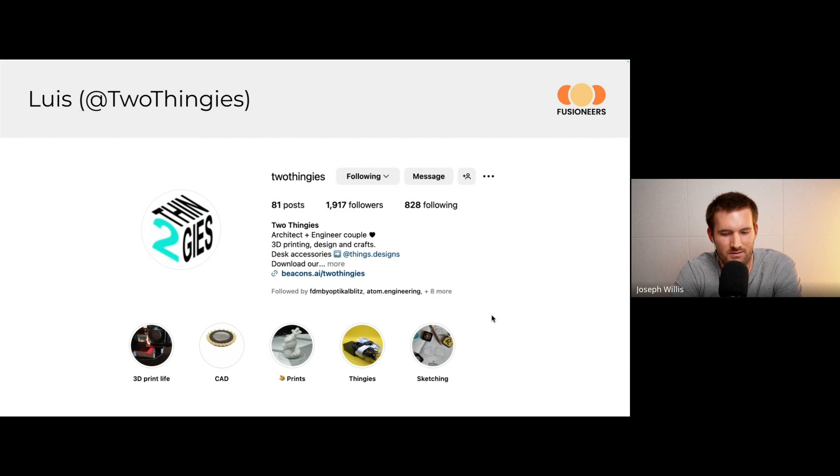I'm Joseph, and today we're going to do another expert design walkthrough. Today we have Luis with TwoThingies. He also has some other Instagram pages where he shares different content. I'm pretty excited about what we'll be going through today.

So Luis, you were telling me a little bit before we started recording how you and your fiance manage this account. Can you tell the audience a little bit about how y'all do that? I think it's pretty interesting that y'all can do a two person Instagram account, and it works out pretty well for you. Yeah, thank you.

My fiance Uri, she's an architect. She has a good eye for aesthetics, and she's really good with photography. And I'm more, let's say, on the modeling side. I like designing functional things, using 3D printing to make functional designs. So we decided to combine those two sides to share useful designs for 3D printing.

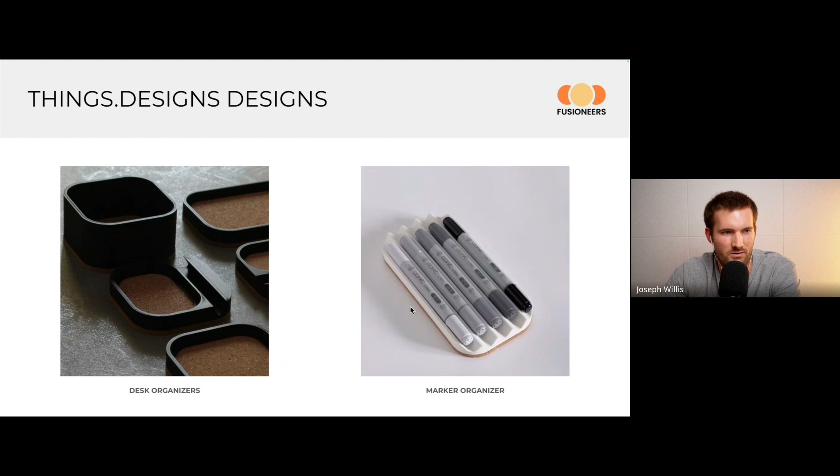And then here's some more from his Things.designs account, where I think it's more focused on desktop accessories. And here you see the corkboard again, and this looks like a marker organizer. So I just really like that aesthetic. I think that's a really clean design language that you have there.

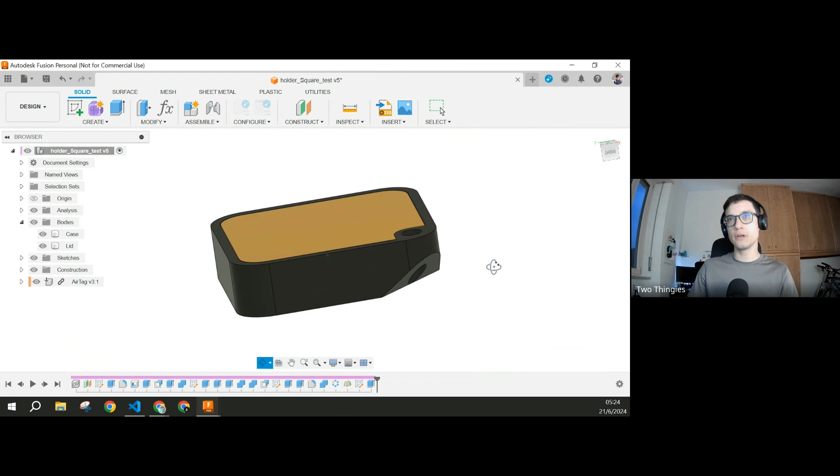So I'm going to be showing you how I modeled this. It's a pretty easy design, so I think it's great for when you're learning Fusion, or when you try to design something simple to 3D print. This could be a great example. Yeah, to sort of interrupt you there, but I like how you have the AirTag as a linked component. That's for people that aren't aware.

You can basically insert other components into your design; it references another design in a way, so you can have the linked component outside of your file and then insert it and design around that. So if you're designing multiple AirTag holders, it makes sense to make the AirTag once, and then you can pull that in and model your different designs around it. So I think that's a really good use of that feature within Fusion.

So yeah, sorry to butt in, but I just like to make a comment where I think that you did a great job using Fusion there. So go ahead. Thank you. Yeah, thank you.

Well, the first step is always save your work before anything goes wrong. You can always come back to it. So yeah, let's get started. So the first step, of course, is to insert a new component. In this case, I have already saved here a folder with 8 different AirTag designs. Some of them are already online.

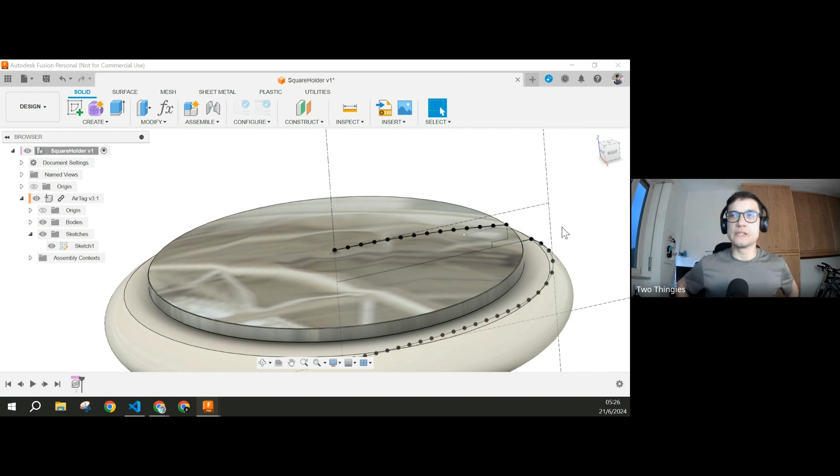So, for example, this is an AirTag. I just downloaded the Apple design guidelines, and they have the profile of the AirTag. You see, they have also all the contour points. So I just copied that to Fusion, and this is a revolve body. I cannot edit in place with the free version, but when I come here, you see it's just a revolve operation. I separated the cap and the body, but it's not necessary if you just need the contour.

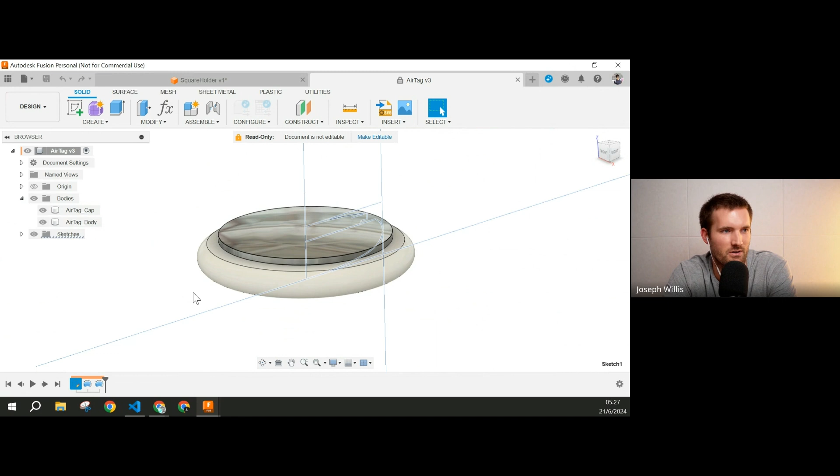So for people that are wondering, the reason he separated it, most likely, I'm just assuming this, is that way you can assign different materials or appearances to both of the bodies. So it makes it easier to make it look more representative of the actual product. As you can see, it has a mirror finish on the bottom, and then the more white plastic, which is characteristic of a real AirTag. So is that what you were thinking when you did the two bodies?

Yeah, on one hand, yes. On the other side, I wanted to see if it was possible to separate the two of them for some designs. Not in this one we are going to do now. But there are some designs in which I wanted to be able to split this and pull it out. So having separate bodies is good for that. It's easier for doing that.

Makes sense. And then just real quickly, I didn't know that Apple released those. I've always just tried to reverse engineer it by hand. Where do you go to find those? Do you search something, or what's the best way that you know of?

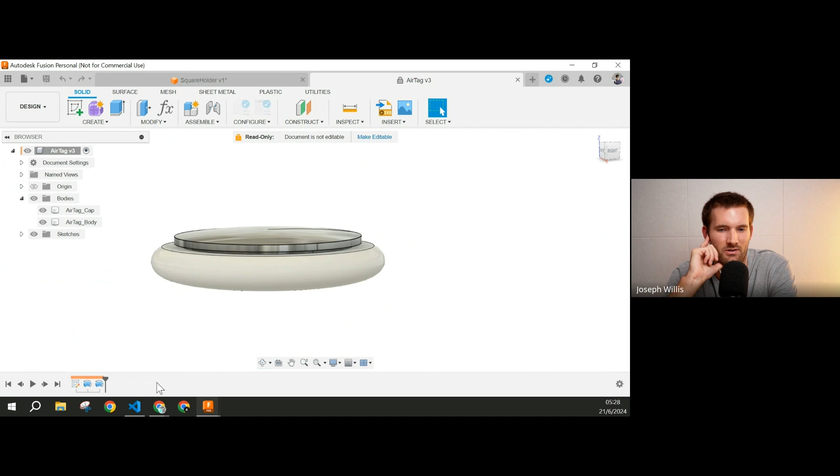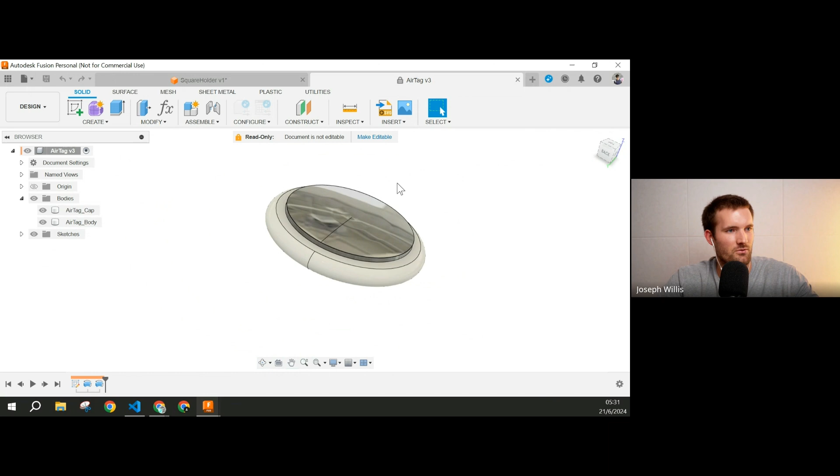Okay. All right. So coming back here, the first thing I did was insert this directly into the design so I can reference it while designing. So next, let me show you how it works physically. So the idea of this design is to, I don't know if it's something we can see.

So the idea of this AirTag holder is to have the logo visible here, and then the rest of the AirTag is covered. So I'm going to create an offset plane and start drawing at this level, before the cap meets the rest of the body.

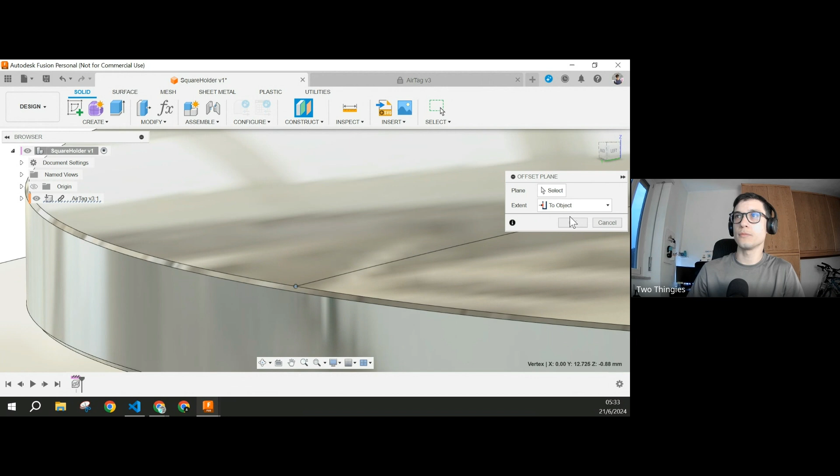Okay, so first thing here, I'm going to create an offset. Instead of distance, I will select to object. And then I will select here this edge, the bottom edge of the chamfer, or a point on that edge. For example, here. And make it parallel to this plane here. And then selecting this point, it becomes coincident with that.

That way I avoid taking odd measurements, like this is 0.88 millimeters or something like that. I avoid taking this measurement by hand. I just reference some geometry to do that. I will create a sketch here. I will call this one top plane. I like to give names to the planes, so it makes it easier for me to reference it back.

So basically, you made a new plane that's going to be the base, or the part that you extrude from, because the AirTag is a little curved on that surface there. So you essentially offset the plane to where it's at the level that he wants it to be, flush with the edge there. Just for everyone that's listening.

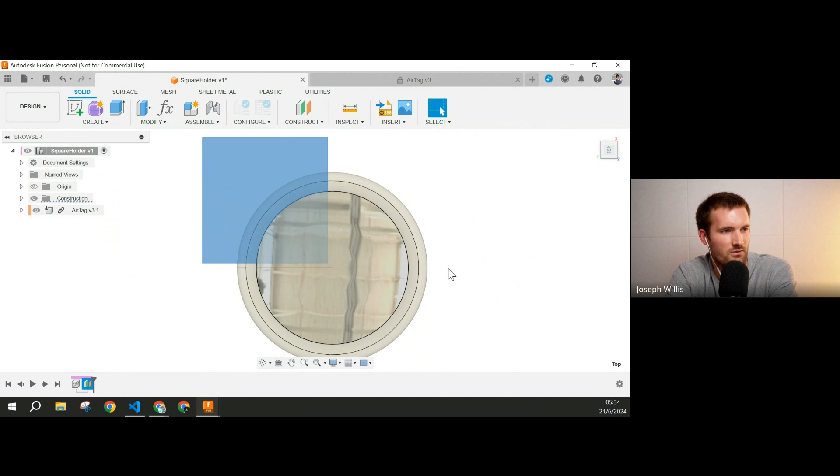Yeah, exactly. For example, there is a planar face here. You could sketch here, but I prefer to avoid taking this odd measurement. For example, here is 1.41 millimeters. Then you have to remember that, make an offset of that distance. Then everything you extrude has to consider the offset from this face. So I just prefer to place the sketch plane on a reference geometry in this case. Making it easy for yourself. Yeah, exactly. So the next thing, I create a sketch here.

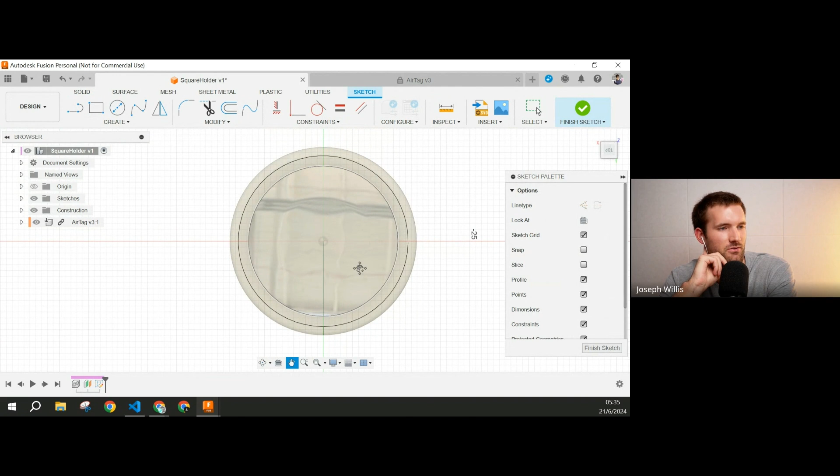And for that window, did you use the S shortcut? Yes, I pressed S on the keyboard. When you press S on the keyboard, you get some options, right? I think the create sketch option wasn't here by default. I added it. When you search for any command, for example, if I look for a shell command, it gives you the option here to add it. Like pinning it, sort of. Yeah. So it becomes available next time.

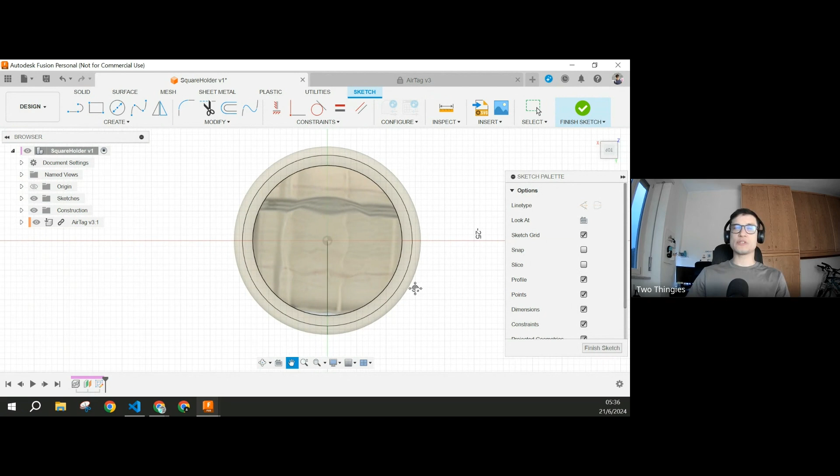For some reason, I've never gotten a good habit of using that. It's a very useful thing to use. So the S key will let you search for different commands, to make you more efficient. Yeah, it helps you save some time. Also, sometimes you don't remember exactly where some command was, so it's easier to just have it there, especially things you use all the time.

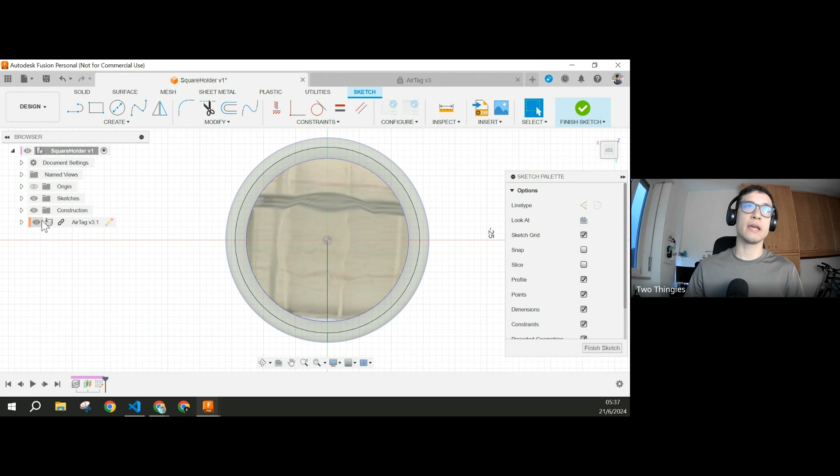So here what I do is a projection of the AirTag to model from it. So I do project on sketch. I press P on the keyboard, and that brings the window for the project command. I will project some specified entities in this case. So I select here the outer edge of the AirTag and project that one. And I also want to project the outer contour of the AirTag. Okay, so now I have those two features. I can hide the AirTag, and I can work on this.

I also like to create some parameters to adjust later on the design, especially with 3D printing, things that I know I will probably need to come back and change after maybe a first prototype. So I come here on the solid tab, select change parameters, and create a new one. First one is definitely a clearance parameter. In this case, I already did the design, so I know the actual value. I'm not going to change it, but it's useful to have it.

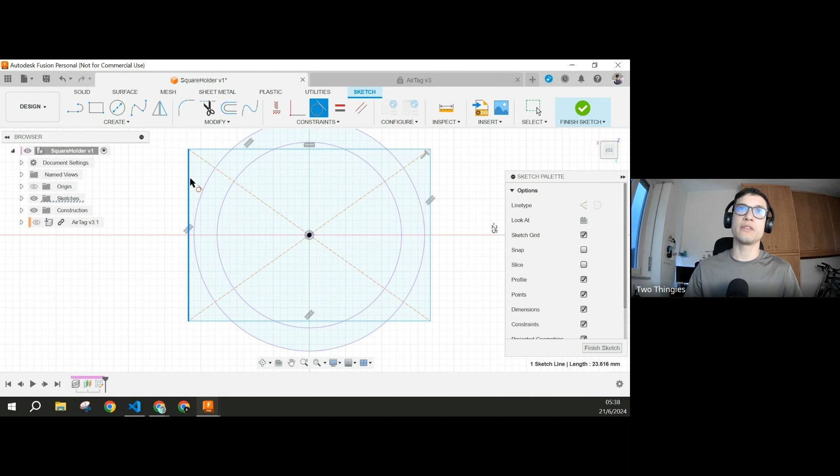And I define some other things, for example, a wall thickness that I can use while I'm designing. I think that's it for now. Maybe I can add some others downstream as we go. So coming back to the sketch, I press R for the rectangle, select the center rectangle and create a new one, just like that. And I add some tangent constraints to make it tangent to this one. Oh no, sorry, I messed up.

Okay, that's all right. So first thing I want to do now is to create some offset lines from these two, so we don't have any matching faces to the AirTag, just a small clearance, the parameter that we created. So I create here an offset, select this one, and give it the value of the clearance parameter that I just created. I make sure that it's on the outer side. If I wanted to change that, I could just click here. So here's OK.

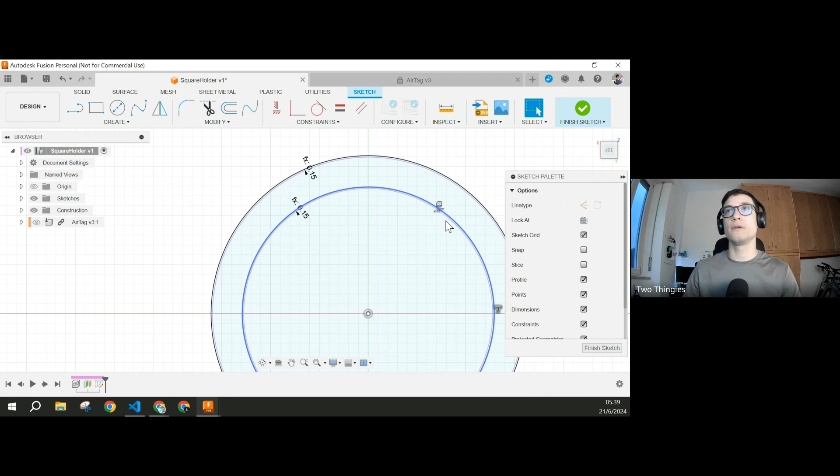And I will do that also for this one, also referencing the clearance parameter. What makes that so nice is that if you have a printer that's slightly different tolerance, it's easy to change your clearances there just by changing the parameter, and then everything updates, and you can easily print again, or even if you have a small part, you can try a couple of different clearances on one print bed just to be a little more efficient to figure out which one fits best for your printer. So I like that a lot.

Yeah, it's really, really useful. Like the times I didn't create the clearance as a parameter, it takes more time to go back in the design and check where did you use this dimension, where is it propagating, what features are affected by it. So it's just easier to just have a parameter that you can change directly.

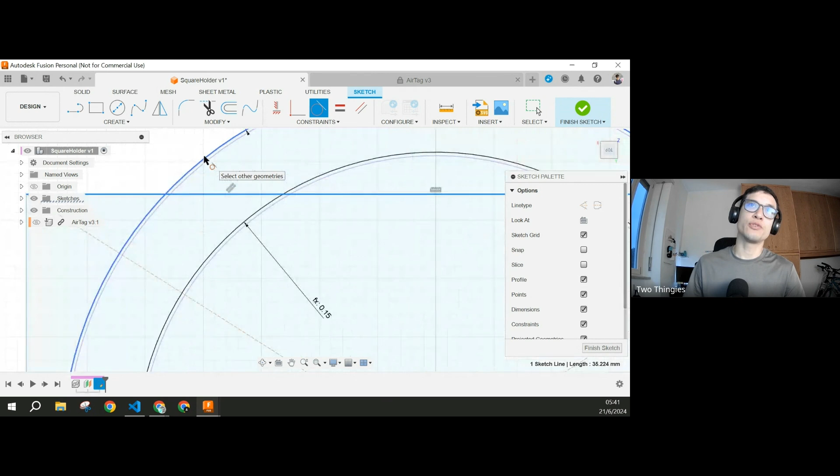Right. So yeah, once we have that, I press R, or I come here. It's the same, and I select a center rectangle. I center it here, and I just throw it in there. I don't care about the dimensions. That's why I have the reference geometry. So I add some tangent constraints to the outer circle. So now it's tangent there, and also here. Fine.

So that defines where the AirTag will be enclosed, the inner side of this enclosure. And I want to create the outer side. So I just add another offset, and I just add the wall thickness. In this case, I just want it on the opposite side. So yeah, now we have this base sketch.

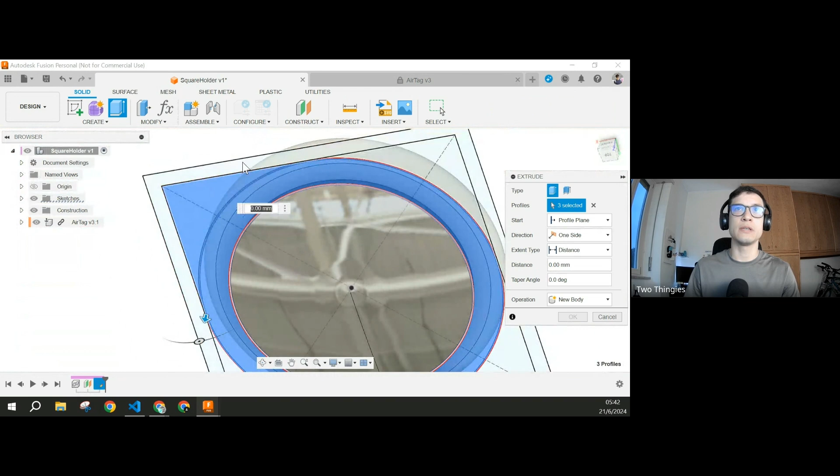I can directly from here hit E for extrusion. Maybe I'll bring back the AirTag just to see what I'm doing. So what I do is select all the profiles, and I'm going to extrude it. Now I know this because I already did it. Distance I want to use is 9 millimeters, minus 9 millimeters, and I'm making sure it's in this direction, of course, to cover the AirTag. That's why it's helpful to have the other body visible.

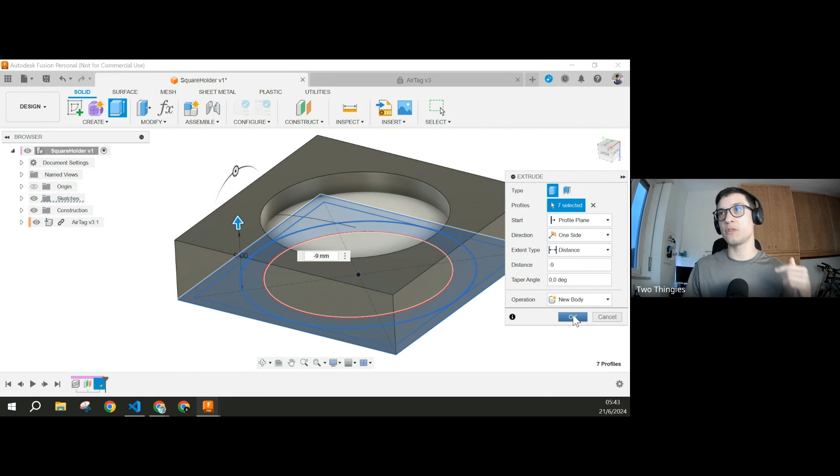Since it is a different component, it won't merge, so by default it creates a new body. If I was using the AirTag as a body within this same component, then I will need to make sure it's a new body, otherwise it will join everything together. So yeah, I just create this one.

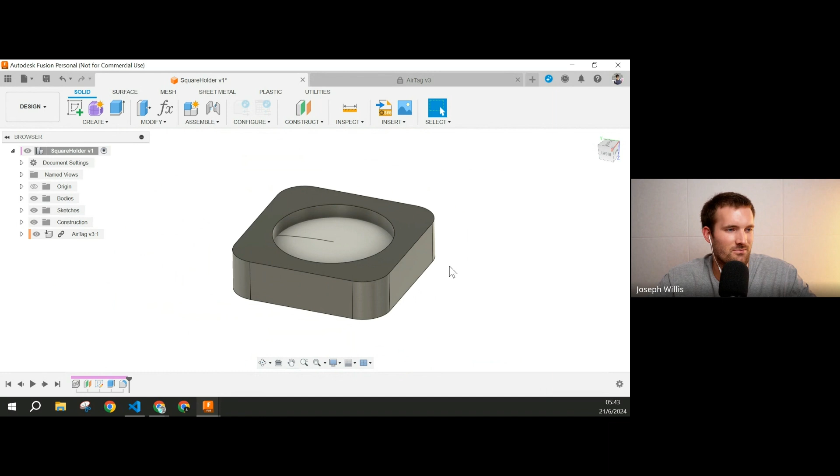Next, I want to add some fillets to this. So I pressed F on the keyboard, and I can select here the edges. Now I'll give it a 6 millimeter radius. And for your fillets, do you have any thought process behind that? I kind of just guess and check honestly, and just see what looks good. Or is it just what's pleasing to the eye? There's probably some design science behind it, but I usually just pick the one that looks best to me.

Yeah, well, really with these kinds of designs, they are functional, but mostly aesthetics. They won't break, they don't have to hold any weight or something like that. So it's just the form factor that you want to get. Right. So what I do is, if I want to make different designs in the same series that look similar together, for example, the desk accessories series that you were showing on the other Instagram account, I try to keep the same ratio of radius versus the side of the component.

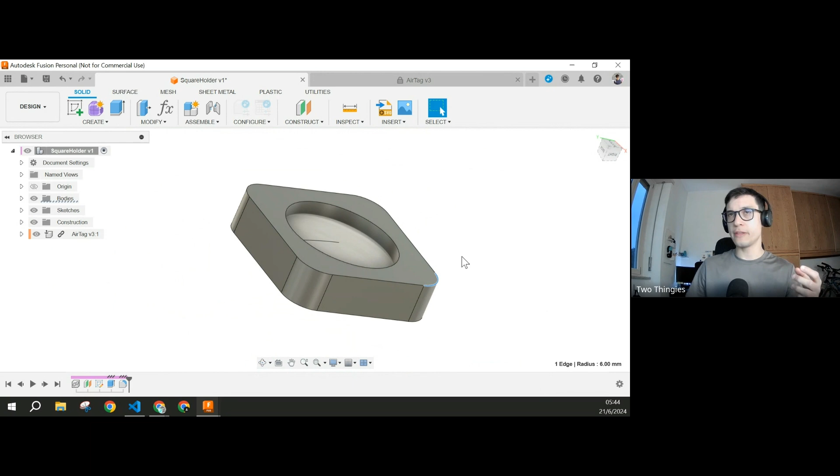For example, this one is 35 millimeters and the radius is 6 millimeters. The ratio between those two numbers, I will try to keep it constant. So if I design another component which is part of this series, let's say a bigger component, maybe a base, a phone holder, or an iPhone charger, I will keep the same ratio of radius versus side to make it look similar. Okay, I see. Yeah, and the other thing is, if it was a component that is more structural, something that needs to bear some loads, then I will check.

For example, if I need to bend some sheet metal component or something around this radius, then I will check the thickness. You know, they always tell you 1.5 or 2 times the thickness should be the radius. That's it. But for more things like that, it's just depending on what shape you want to get. I don't have a rule.

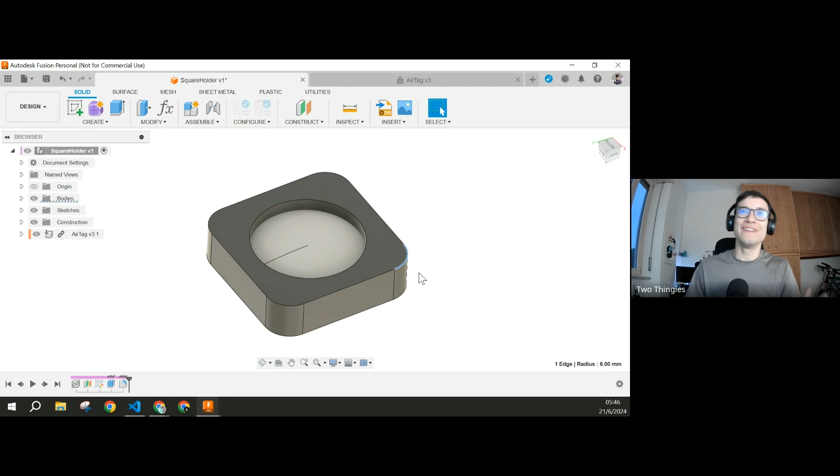Yeah, that makes sense. I like the ratio thing. I never really thought about that, but yeah, that makes a lot of sense. Yeah.

So here the next thing I do is I do a shell. We'll create a shell here on the top face. In here I specify again the wall thickness, making sure it's an inner shell. Okay. So I hit OK. So what I also like to do is to create a cross section. I'll make a section analysis here so we can see what's going on.

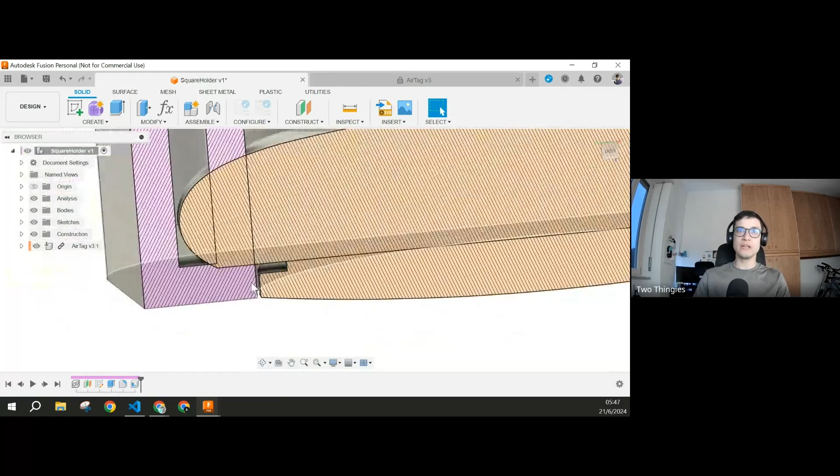So we have a weird shape with this opening here, and then it intersects the AirTag. So I'll just delete it. I can just press delete here. Oh, it didn't work in this case. If I just press these two, I can delete this face. Okay, so it disappeared. So if I hide the AirTag, we have this empty space here, this cavity here, but there's an intersection here. There are intersecting bodies here.

So what I will do is I will pull up this face even more, 2 millimeters. So that made the intersection even worse. But now what I do is I create a cavity where the AirTag can sit in this print. So I will just do a combine operation. I look for the combine operation here.

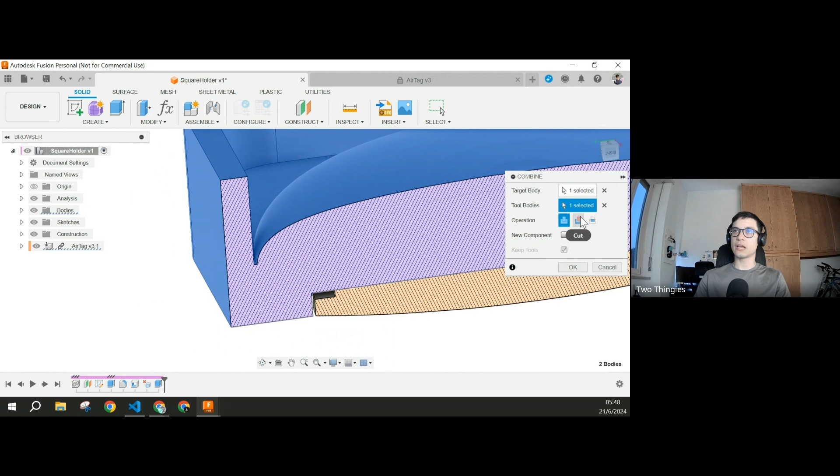And I use this cavity as a target body and the AirTag as a tool. And I make sure I'm selecting the cut operation. That way I remove the intersection. And when I remove the AirTag, if I hide it, you have this nice space where the AirTag can sit when you insert it. So we can move on with the upper part. Now, if I look at it from the sides, yeah, it covers the AirTag, so it's fine.

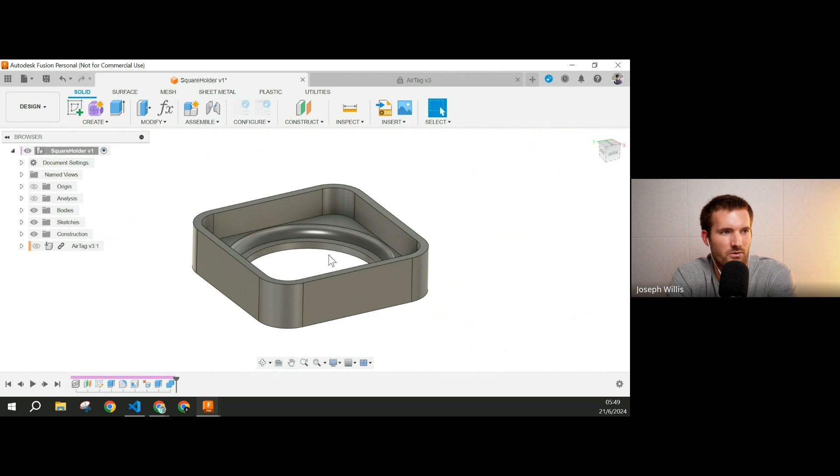Yeah, I like how, when you subtract out the body there, it helps to make sure that the body you're subtracting out is right, and make sure it fits good. It really does make a pretty tight fit there, and that's an easy way to make things. As long as you reverse engineer the original body, it'll fit pretty well, as long as the printer also holds pretty good tolerances. So yeah, I like that technique. Yeah, thanks. It's really useful, and it's one of the main reasons why I wanted to design this following the exact dimensions.

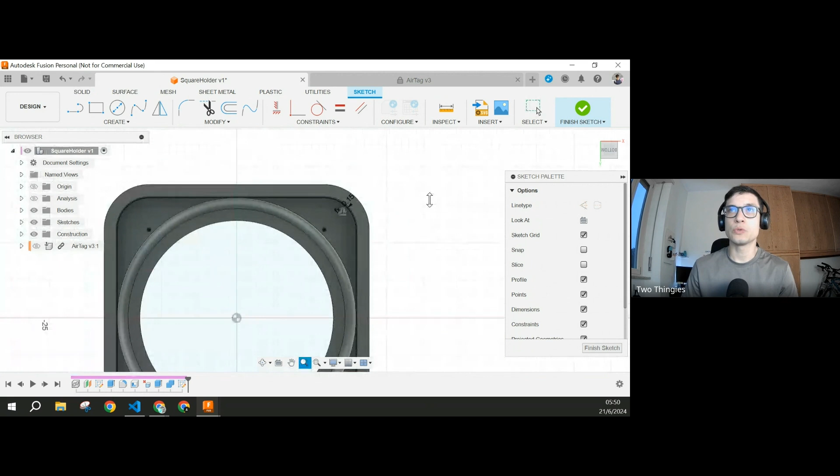So yeah, now we will make a new sketch on the top face here. This time I went to the menu to select the sketch option. I'll do some other offset lines here. Again, using the clearance. That's why it comes in very useful, because you can use it several times. In this case, I want this to be on the opposite side. And I will also make some line.

I pressed L on the keyboard, and I place it here on the center and come all the way up here. Just to do it again, so you can see I place it here, and then when it comes here, it's just at the center. It gives you this midpoint symbol, this little blue triangle there. I like to make this one a construction line. And then I will make a hole here for this keychain, and I will give it a diameter. But I also like to create a parameter for the hole diameter, because it's something you could need to change.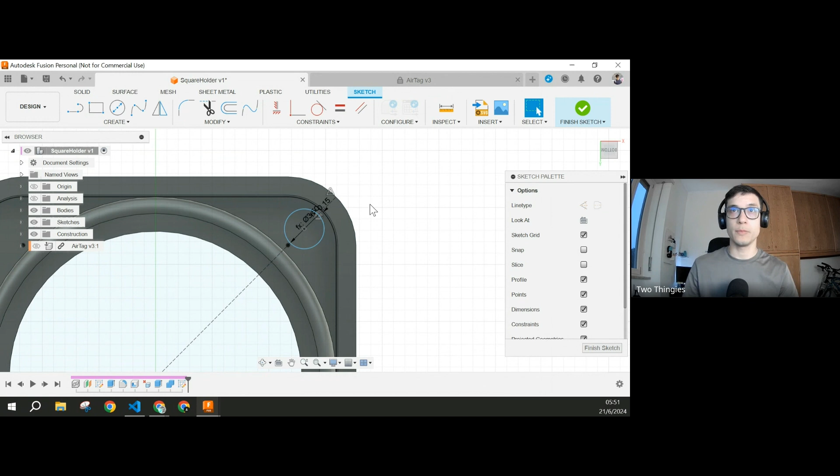Hole diameter. I'll give it 3.5 millimeters. So when I come back here, it's the hole diameter, and then I'll add some distance here across this line to constrain it. So I press D for dimension. I select this point, click on the circle. I right click on it, and I select the pick circle or arc tangent. So that way, now it doesn't do it. Press D again, escape, escape, and D.

Okay, so there you add the dimension, instead of using the center of the circle. Yeah, I just learned that. I think Autodesk or one of the Instagram accounts did a short about that, and I learned that little trick recently. It's pretty useful in a lot of different situations.

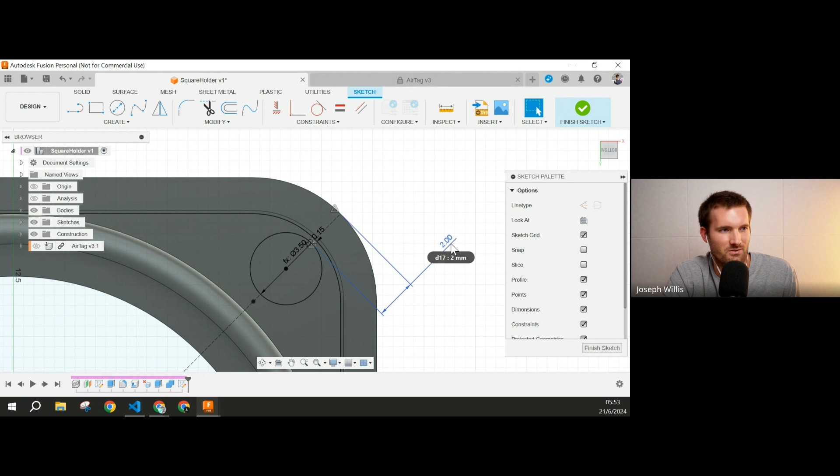So yeah, glad that you showed that, because if you don't know it's there, you have to do some kind of mental math and tricks in your head to get it in the position you want, especially circles or slots. So yeah, I like that little tip. Yeah, it's really useful. If you don't know it exists, then you start doing math like, okay, this is the diameter, this is the distance I want, I want to subtract half the diameter. So yeah, it's just much easier, very convenient.

Yeah, so the next step is I'll just create another circle. I want to make it coincident with this one, and I'll make it 6 millimeters. Actually, let me show you why I do 6 millimeters. Maybe I can do it a different way. Instead of the circle, I would just use another offset. I want the offset to be slightly less than my wall thickness.

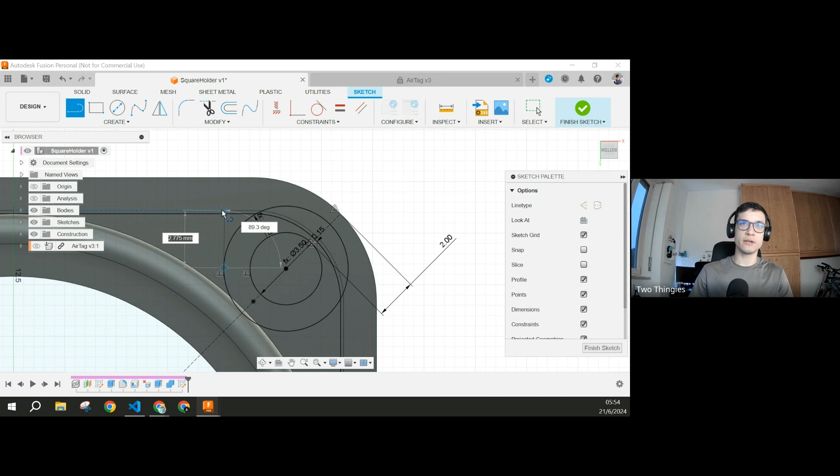I just want to make this corner where the keychain is going to be attached. So it will be part of the frame, and then the lid will have this cutout here. So you will have this lid and the frame with this corner here. I think it looks pretty good. I mean, I like the way it looks.

So what was the reasoning behind making that wall thinner? Was it just a design preference, or was it an interference thing, or what was your thought process behind that? Well, it's just because I don't want to. If it was thicker, for example, if we added this, well, we could just leave it as 1, for example. But it just takes up a little bit more space here. I see. Yeah. It's a slight undercut.

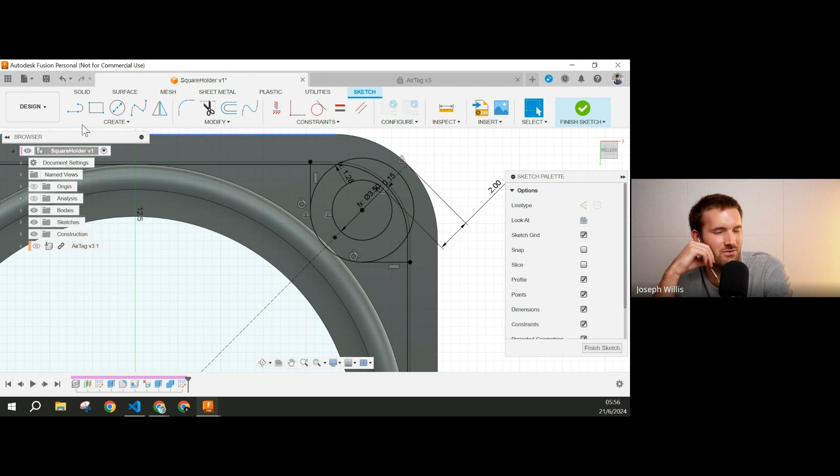It's, let's say, what do you call it? TOC? Obsessive. Oh yeah, no, OCD. OCD. Yeah, sorry, that's my description. So yeah, really, it's not that important actually. I see. Yeah, I was just curious. Cool. It's just personal preference.

So now I'll just extrude the lid. So it's just this area here. I will make it 2 millimeters, this opposite direction. Since it's not touching anything, it's just a new body. Otherwise, I will again need to make sure it's not joining. Yeah, that's important for people that are just getting started. It's really easy to not notice that and then have parts get joined together, and then you kind of get lost in where that happens. So yeah, I'm glad you're pointing that out.

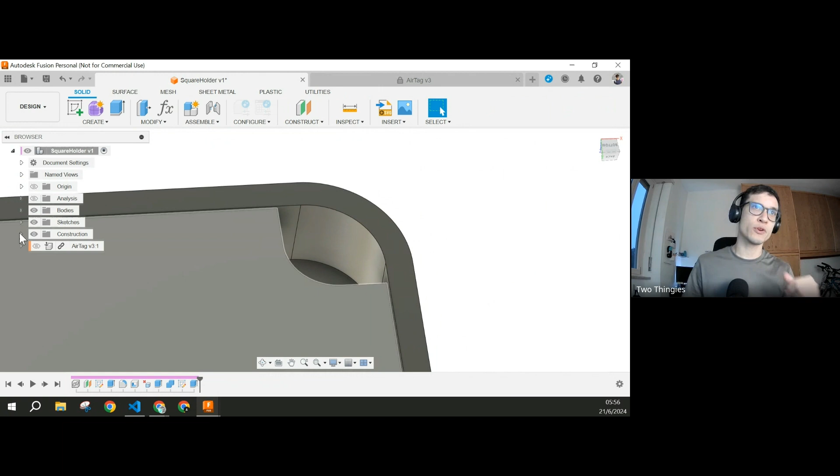Yeah. When I started with Fusion, I come from a SolidWorks background. I used a lot of SolidWorks in college and university, and I also worked a little bit with it in my early days when I just graduated. When I started using Fusion, I found that it defaults to join all the time when you have separate bodies. So it's good to keep an eye on that. Right. You get used to it after some time. Definitely.

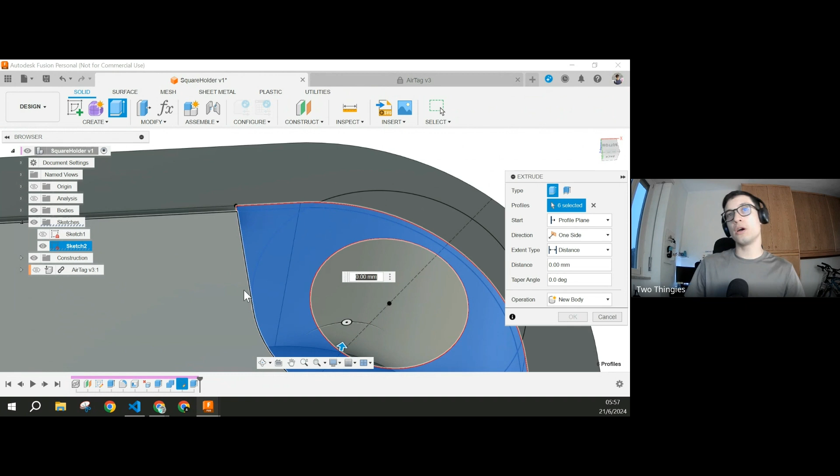So this sketch here, I will use it now again to extrude the other part of the frame, the missing part here. So I'll just select the missing profiles. One important thing, let me go back there so it's easier to see. When I created this line here, I made sure it went all the way through the outer line. So I get this small section here. Because then when I extrude the frame, this would be part of the frame. If I didn't have this small line here, I would just be able to select this one and this would be open. So I just wanted to make sure it connects to the rest of the frame.

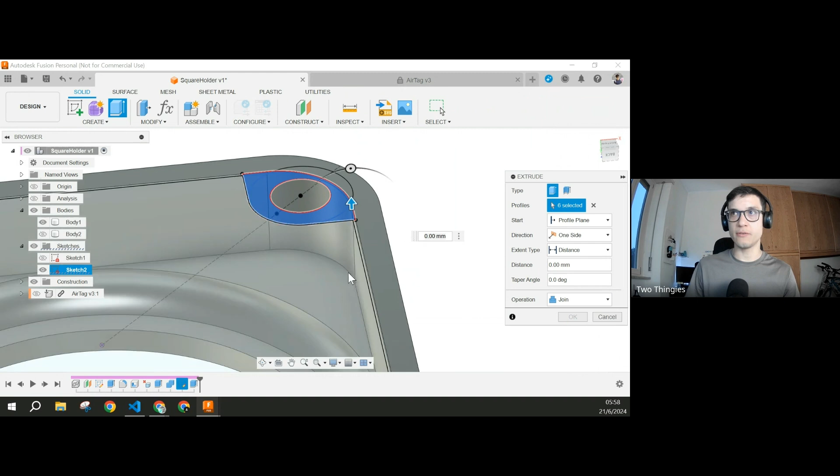So if I just hide the lid now, I hide it to make sure I can join directly just the frame. I will extrude it to this bottom face and hit OK. Now it's joining this whole body. Okay, so we have these two bodies together. Now I like to add some naming here, so it's easier to distinguish.

Also, sorry to interrupt, but for people that are getting started with Fusion, when you change the name of the body and you export to 3D print, it defaults the STL file to whatever you have the body named as. So sometimes if you don't change the body name, it'll be body 1, body 2, and then it's difficult to remember what's what.

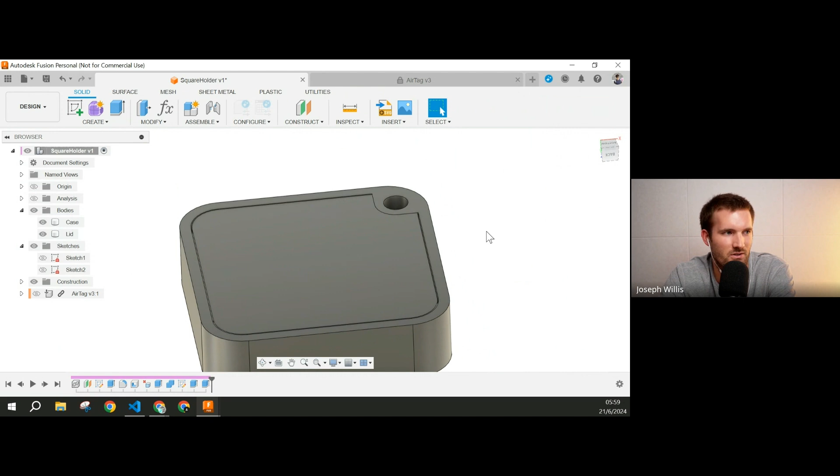So if you wanted to export with a certain name, then you just need to change the body name, like you just did. So yeah, exactly. That's another reason. Like when you export, you find body 1, body 2, body 3, and it's a mess. Also, when you're modeling, sometimes if you want to reference some body within your components, you need to start toggling between them to remember which one is which. So just having the name really helps.

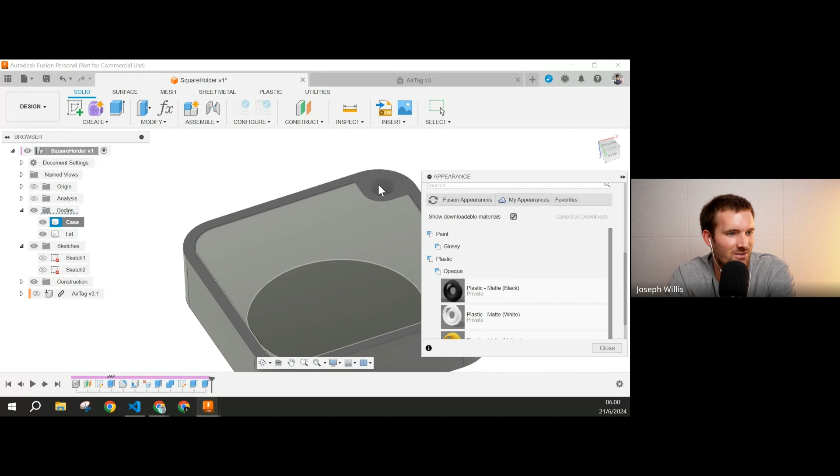And also, I like to add some appearance to the bodies, just to make them easier to distinguish. So for example, I've thought about changing my default color to something besides the gray metal at some point, just so it'll be different. Yeah, it's also just nice to see it in colors. Right. See what you're working on, what it would look like. It's not a photorealistic render, but it gives you an idea of what it looks like.

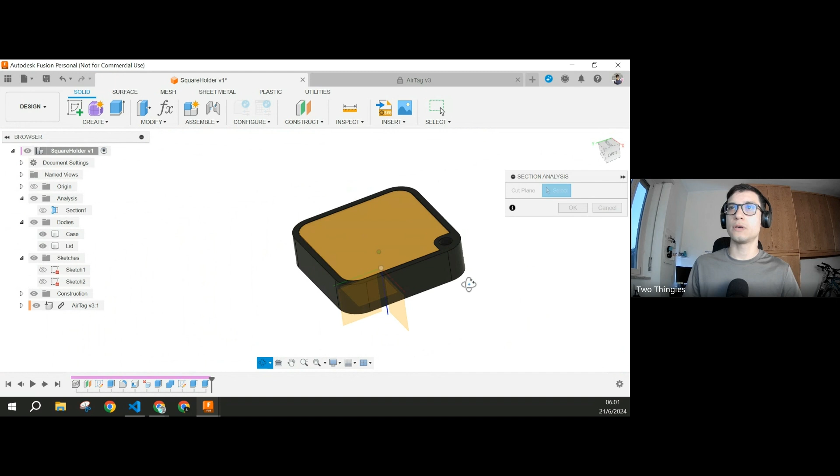Yep. So we are almost there. There are a couple of things still to check. For example, if we look at it from the section analysis, you see there's a little bit of interference here, not much, but still some interference. And then if I create another section analysis, I can show you from here, for example. There you can see there's that undercut where I extruded.

So I just do some more combine operations here. For example, here's the target body. Again, the AirTag is the tool. I need to select the body of the cap in this case. Oh no, actually it's the body. And then I do the same again for combine. You could just do the combine operation at the end, so you don't have to repeat it. Like we did a combine operation here.

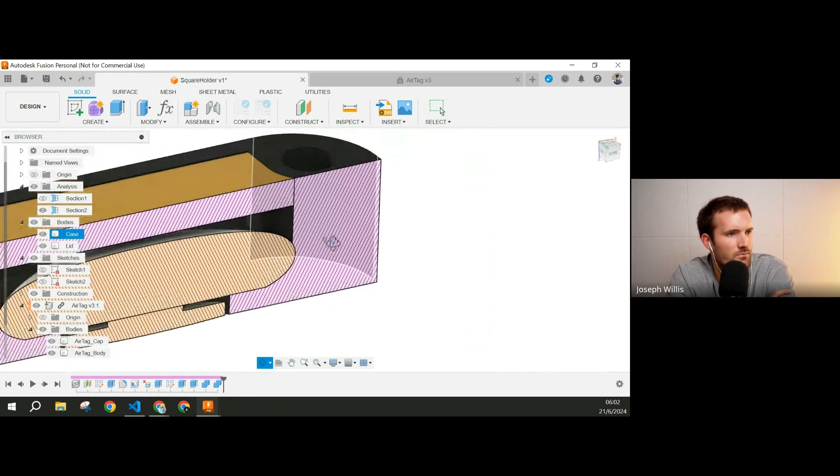Something we could do is pull this back here, so it's now further down in the history line, and I can edit. Actually, I don't need to change anything because I already had those two bodies selected. But since it's now after the extrusion of this part, you see it now cuts the small interference we had there. Makes sense. That way you don't need to make a separate combine operation.

All right. So now we need to just extend this hole. You could do to all or to the bottom side here. I just do a long distance that I know works, or just the all option. Now we have the hole opening there. And we have a lid and a case.

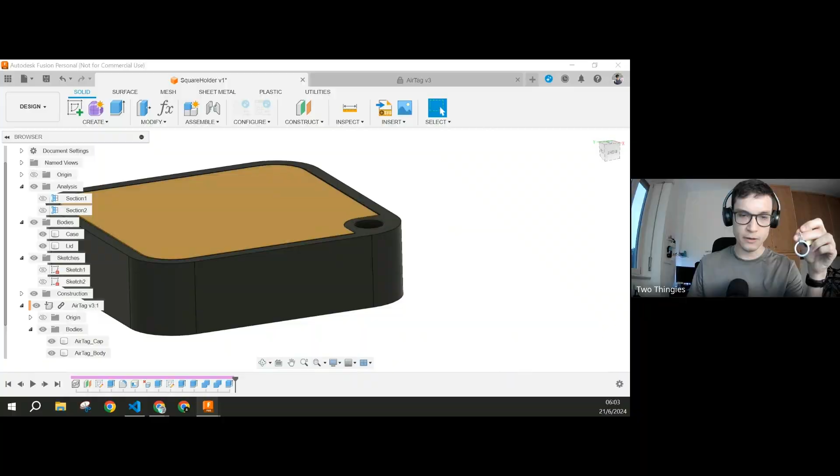Something I added here on this holder, I don't know if you can see on the camera, is a chamfer on the corner, to make it easier to insert the keychain. So you have this ring here. It's not big enough to hold the whole thickness of the AirTag. So you can get a smaller diameter ring to fit around it. Otherwise, you would need a really huge one to fit all this 9mm thickness.

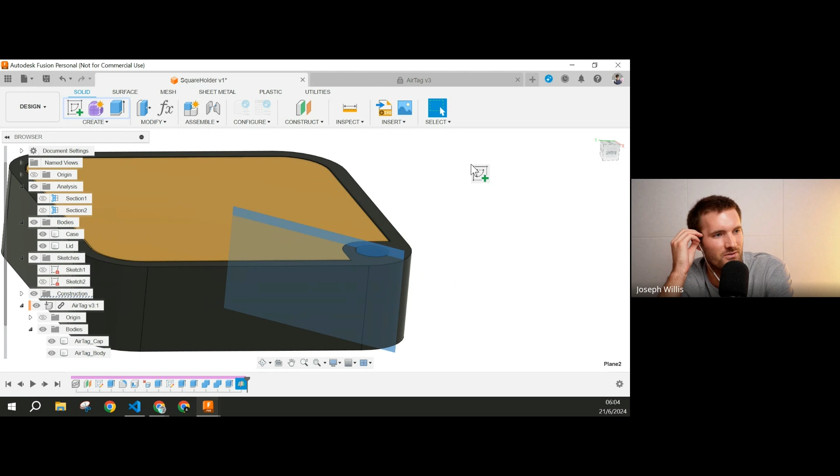To be able to do that, I create a midplane here. Oh yeah, this is a good trick that I didn't know about for a while, making an angled plane just using the midplane trick. And then I can sketch here. So what he essentially did was make a 45-degree midplane between two 90-degree faces. I always thought about midplanes as making a line of symmetry between two flat planes, but it also works as splitting an angle in half. So that's a really easy way to get a 45-degree plane to sketch on.

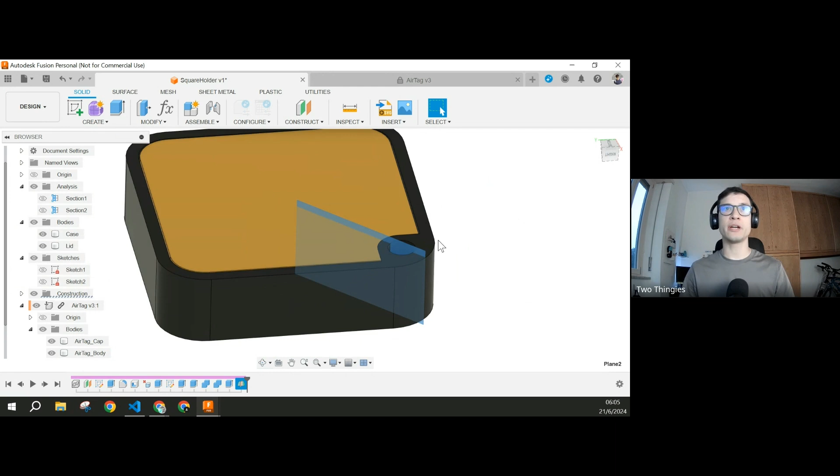So I like that tip a lot. Yeah, it's really useful. Also, even if it wasn't a 90-degree angle, like if you had a 57.5 corner here, and you just want the midplane there, it still gives you the middle, even if they are not parallel faces. Right. So it's really good.

So here I just create another sketch. I do a projection again, in this case of the case geometry. And I will do another projection. I will select by intersection, and I will select this face here, just to see where it's located. So I will do some angled line here. I will make it 45 degrees.

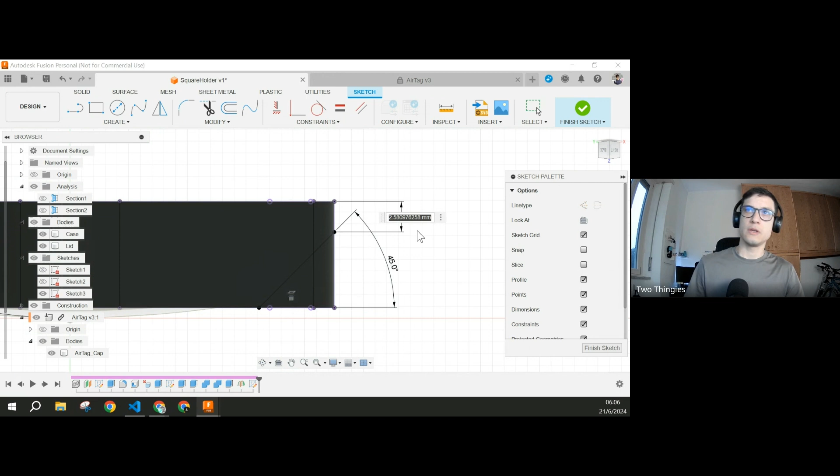And then I give it some distance from the top. Here, I think I used 2.5 millimeters. I'm not sure. In any case, we can change that. Maybe I could add some parameter, like corner thickness. Make it 2.5. I need to change that afterwards. So there's that. And I can extrude it.

I do symmetric. I give it a whole length, or you could just do all. If you don't mind, like in this case, we don't have any other components on the side, so we could just do all, and we cut it. So there we have this slim corner where you can insert a smaller ring.

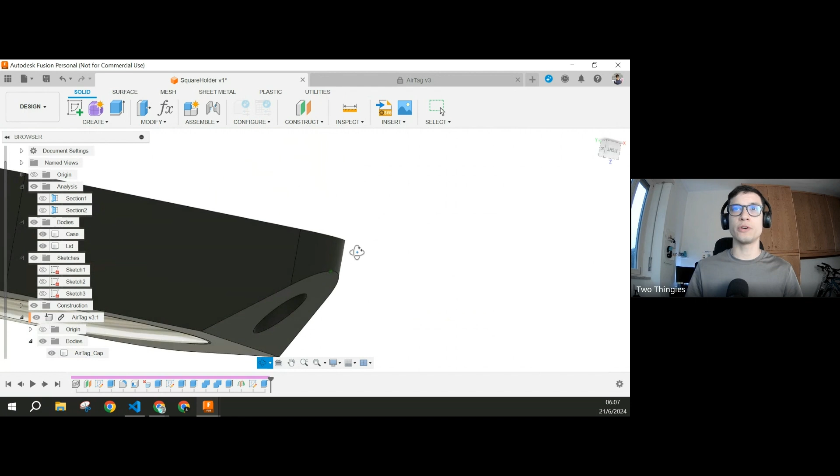Smaller ring. Yeah, it looks really good. Yeah, thanks. Yeah, I think I also like the aesthetics of it. Like it looks sleek. I think I like the way it looks.

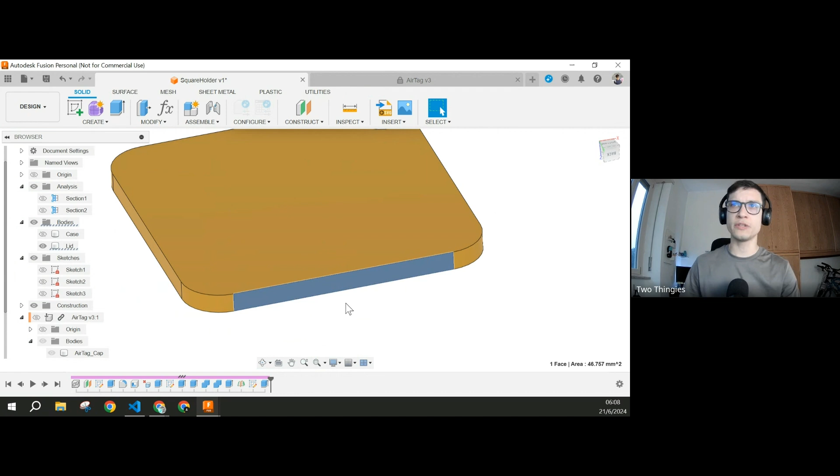So yeah, now we have the lid and the case, but they are floating in the air. So I will start adding the snap-fit tabs. So this is something I learned from Clockspring3D a long time ago. He made a YouTube video. I don't know if you're familiar with him, with his work. He creates different enclosures and boxes and fun designs for 3D printing. And he did some YouTube videos showing his workflow for creating snap-fits and modeling 3D printable components.

And since then, I've used it all the time. It's a way to create snap-fits. I have adapted it a little bit. I made some changes to the workflow. So basically, we have these two bodies, right? So on the lid, I just come to one side and I just need to create a rectangle. This will be a center rectangle. And I'll just give it 2 dimensions.

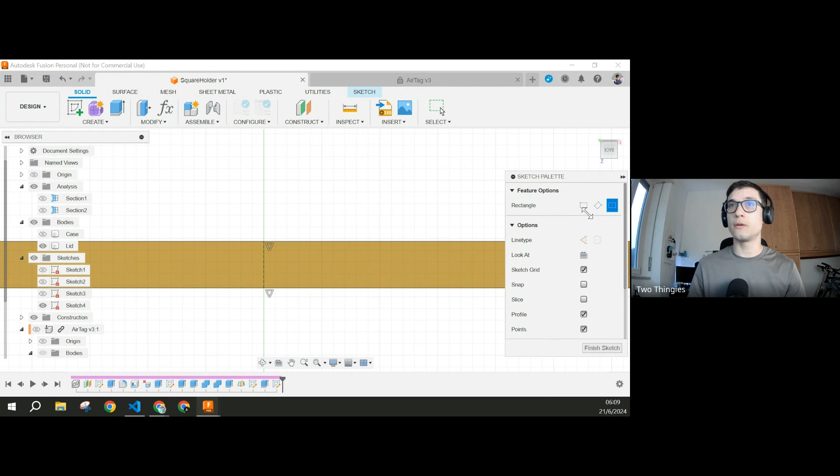This is also something you need to change sometimes. Like if the fit is really tight or you want it to be tighter, you might need to change that. Like for example, the tab width. I'll give it 5 millimeters. And then tab height, give it 2 millimeters. It's okay. And then I'll just create it here in the center. So this is the tab height. This is the tab width. Okay.

Yeah, I just noticed something that's wrong here. If I want my tab to be 2 millimeters, well, let me just go on with it, and I can come back and change it so you can see why I think it's wrong. Yeah, that'd be good. Okay, so here back on the sketch, I will create an offset rectangle smaller than the outer one, and I will give it the clearance that we are using for our assembly. Okay.

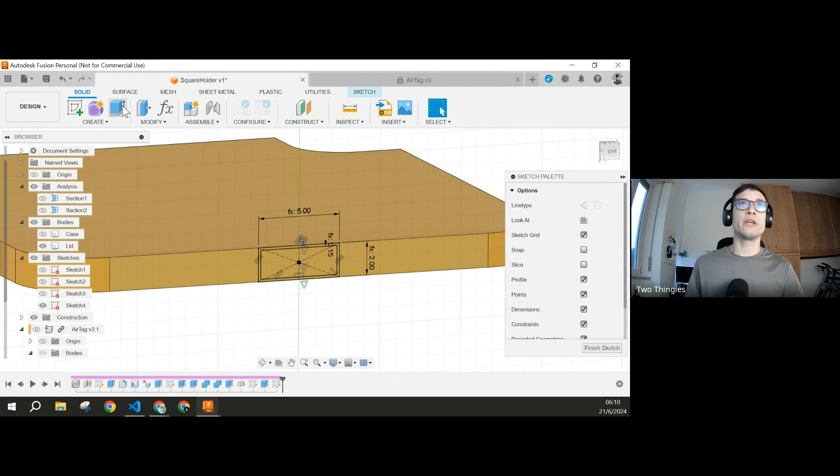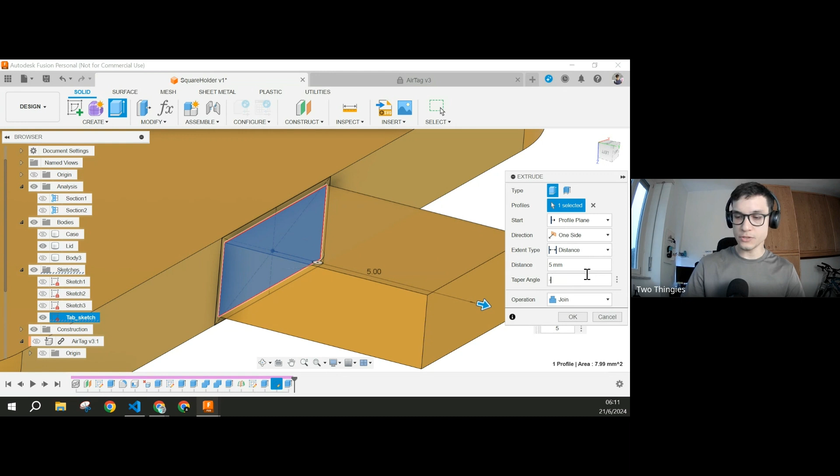So now what I need to do is I will extrude the larger one. I can extrude the larger one by any distance. I can give it, I don't know, 5 millimeters and minus 45 degrees. And I will select a new body, so it doesn't join. Okay, so then I hide this body, come back to the sketch. I can call it tab sketch for later. I bring up this sketch again. I do a new extrusion, again, random distance, doesn't really matter. Minus 45 degrees, and this time I join it. Okay, so now it's part of this component here.

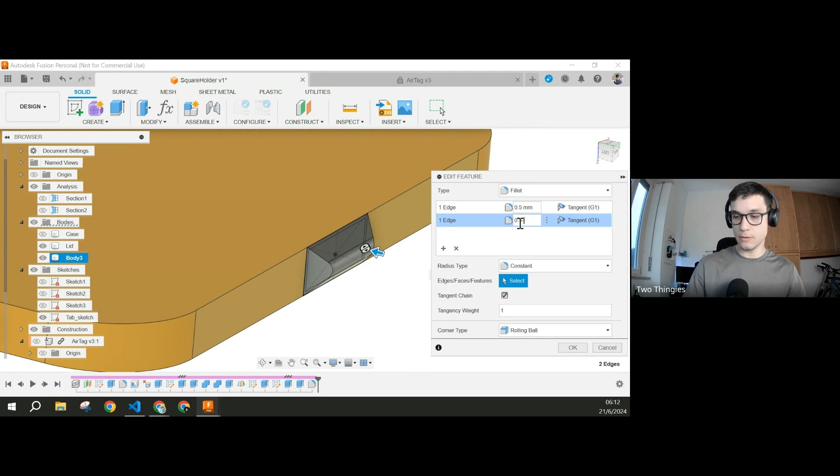I also like to add some fillet. Like here, I will add a 0.5 millimeters fillet. This is also something that would be good to make a parameter. I will just leave it 0.5 in this case. And actually, I like to add the same fillet to the other body as well. I do that. Select the other body, 0.5. Oh, sorry, lost the clearance. Okay.

So yeah, we have this body here, now it's like a tool we can use to cut on this frame component. So we can just go and do modify, combine. I will select the target body, will be the case, and the tool body will be this body three. I didn't give it a name. I don't keep the tool. You could, if you wanted, keep the tool, but I don't do that because I'm not going to need it anymore. So yeah, if you hide the lid, and I'll hide the sketch, you just created this casing here.

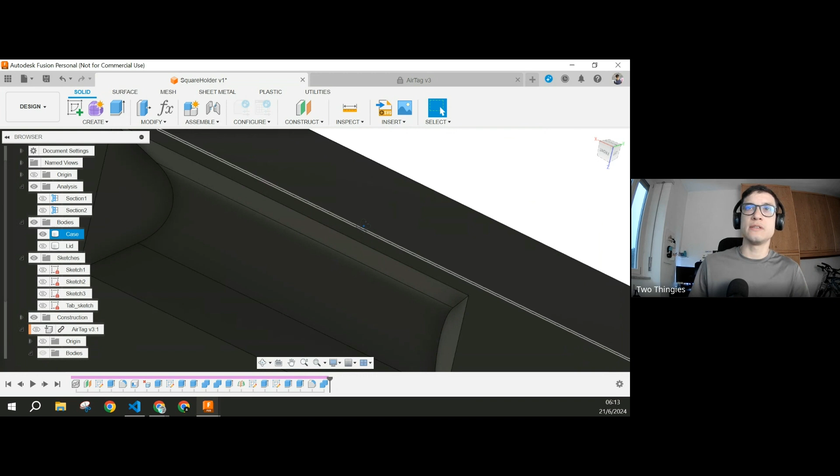Now, the reason why I said something was not correct is because if I 3D print this, the distance here is really small, like you have 0.15 millimeters. So that's about 1 layer line. So this is likely going to split or tear apart either when you insert the lid or when you remove it. So my mistake was when I created the lid component, I extruded it by 2 millimeters. I think I needed to do a longer distance.

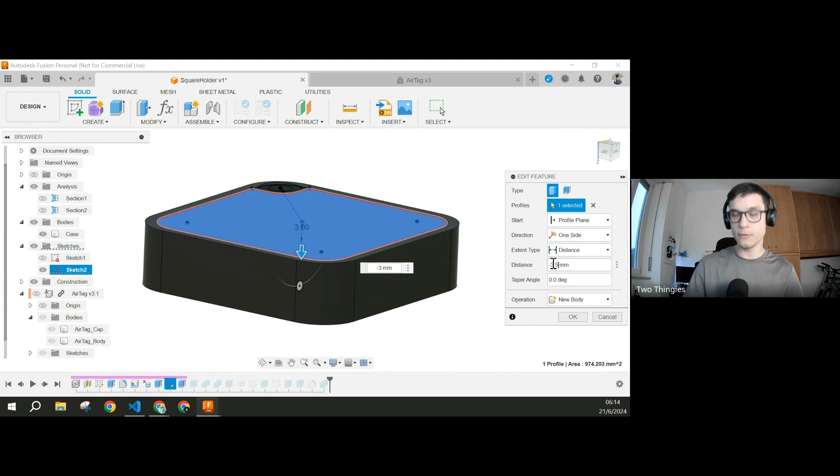So the way to fix that, if I select it here, I can see which feature it references to. So I hit right click, edit feature. Instead of -2 millimeters, I will do -3. I could do -3.5 also if I wanted. Let's do -3.5. Okay, so now it's thicker. If I do the section, it's thicker.

And because I created this sketch using the middle points of this line that I made, it automatically shifts the rectangle, so it adjusts the position. And now you see, let me remove the section and hide the lid. You see here you have more distance here. So it's 0.9. So there's a bunch of layer lines if you're printing at 0.15. So it's more resistant. It won't tear apart as easily as it would before.

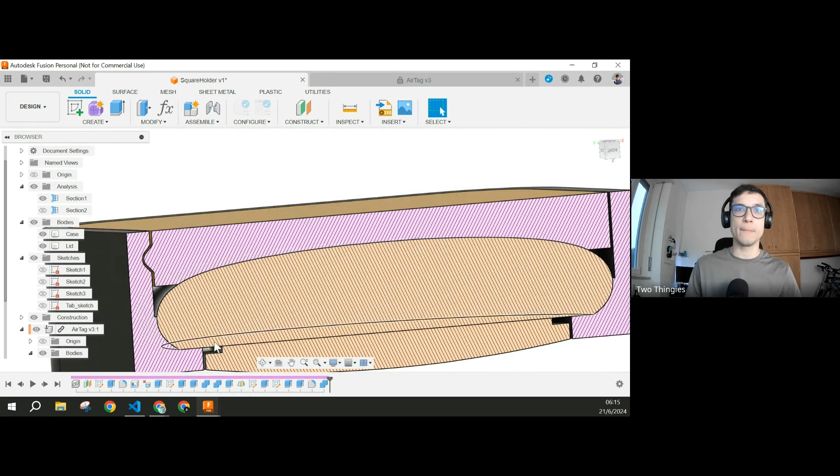The other thing is, because I was using the combine operation downstream of the extrusion of the lid, let's see the section again. You see now the cavity is now larger. It adjusted itself directly because this combine feature is downstream of the extrusion. So when I change the extrusion, it just adjusts here. So that makes it easier.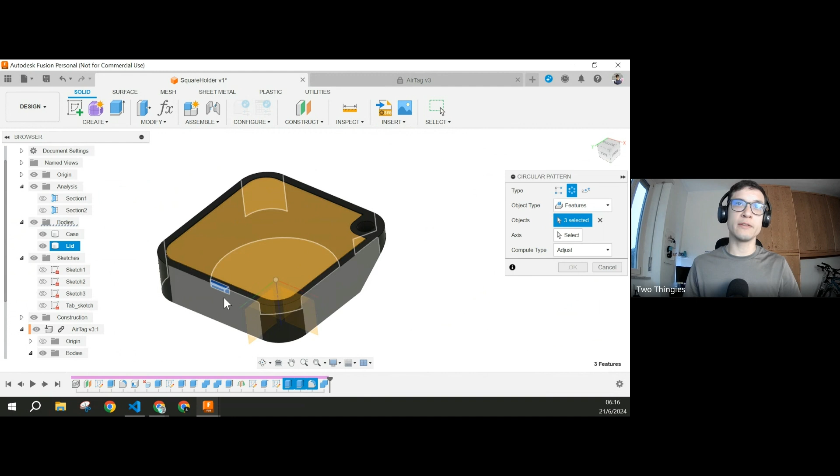Something I like to do now to propagate those tabs, I like to do some pattern. I will do a circular pattern. And now it's counterintuitive because we are working on a square, but we have an axis. Since all the sides of the square are the same length, we can just reference the features that we just made. So we can just select both extrusions, even the fillet and the combine operation. Can select this axis. We can make it 4. We use the adjust compute type and hit OK.

Takes a couple seconds, and then when you come back, you now have the 4 cavities. So you now have a functional design. Like you could just print this as it is if you wanted.

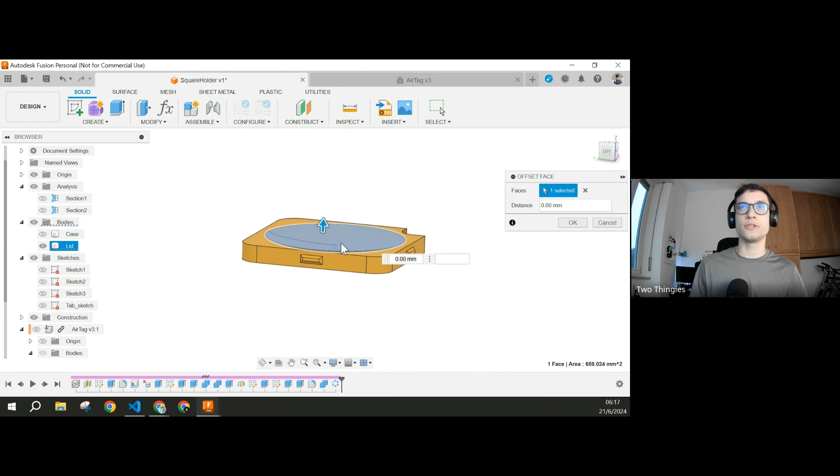Last touch I want to add is on the lid. Let me hide the AirTag. I will just make an offset here. So I will just add a little bit more clearance here. So minus my clearance parameter. That way, if I bring this all together, when I look at it from the side, on the section view, it means it will have some clearance here. So if the printer is not as accurate, or even just because printers are printers, if you're doing FDM printing, you will have more wiggle room for closing this up when you insert the AirTag.

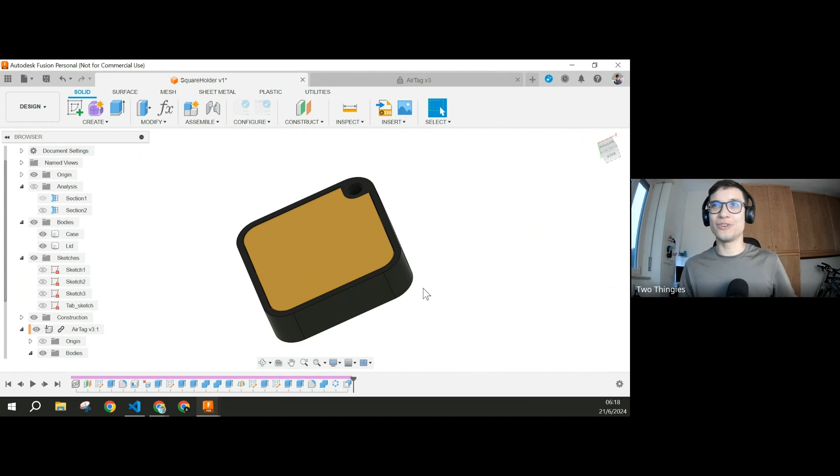So yeah, this is the finished design. It's an AirTag holder. I think it's a pretty simple design, but making the SnapFit tabs like that and propagating them, I think it's a useful trick to have up your sleeve when you're designing enclosures and things like that. It's very, very easy to do.

And the good thing is, if you have the parameters here, you can do a test print, for example. Like if you print only some part of the design. This is not the case, but if you made something like this on a larger design, you could print a small section and test the fit, and then you come back here and adjust the parameters. You don't have to redo the model or go and edit the features. You can just adjust that directly. Makes it really convenient.

So yeah, and I think that is a really good example. Even the mistake you made, if you want to call it that, I think it really demonstrates how having a well designed and thought out CAD model, you can fix things like that pretty quickly, and then everything updated the way it was supposed to, so that you didn't have to go and make a lot of changes, which is kind of the benefit of parametric design software. And having the merge body with the cut in the right place, it automatically updated the top cutout like you demonstrated.

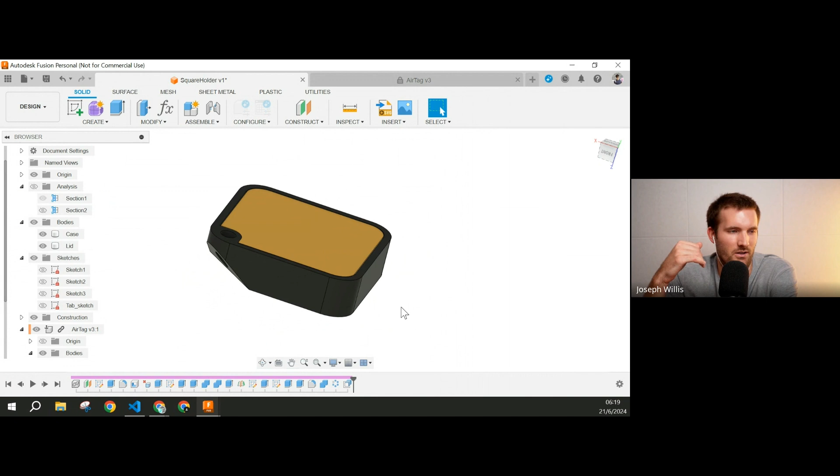So I think that is a really good showcase of what a good parametric design looks like, as far as not having to go back. Because I think a lot of people would be tempted to make a manual extrusion there, where when you had the 2 millimeter thick top, you would extrude some distance to make the clearance work, and then when you change the top thickness, you'd have to remember to go and change that as well, which is really easy to forget, especially in longer, more complicated models. So having things that reference each other like you did, I think is a really good principle to practice and understand.

Yeah, thanks. Thank you. Yeah, I really like using the change parameters features. It really helps you harness the true power of parametric design. But even if you're not using parameters, just having features reference geometry, or like you said, other features, helps you down the road when you need to make changes.

But it's something, of course, you need to get used to, like trusting the fact that it will update when you change it, because you are giving it as a reference a face or a plane, or trusting the sketch constraints. Like you added this constraint there, so it will remain like that. You don't need to go down the line and make a manual extrusion because you added that constraint, so it will update accordingly. But of course, it comes with practice.

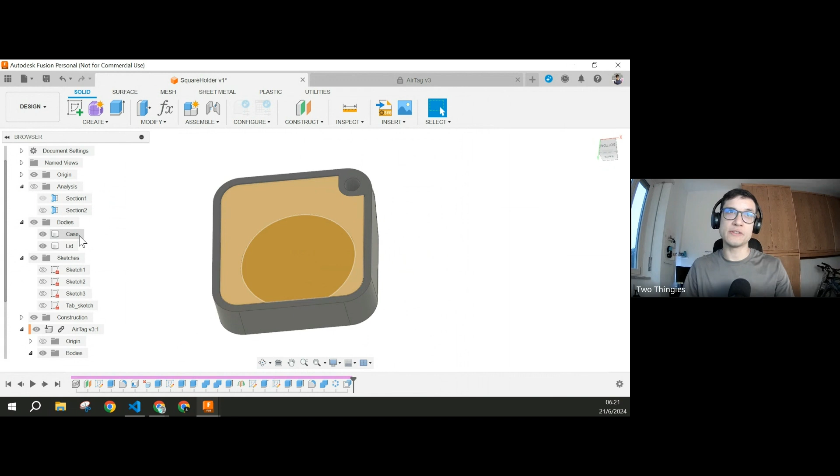Sometimes also when I'm doing designs really quickly, if I didn't add the parameters or the references like that, I will go manually and start adding extrusions on top of extrusions, or adding press and pull to adjust things. We all do that, I think. I definitely do that. It's okay.

It's perfectly fine. I just find that when I have the chance to sit here and think how I want this to work down the line, it helps me get a more organized workspace and feature tree and so on. Like this case, we have a few sketches, and I think it's very organized.

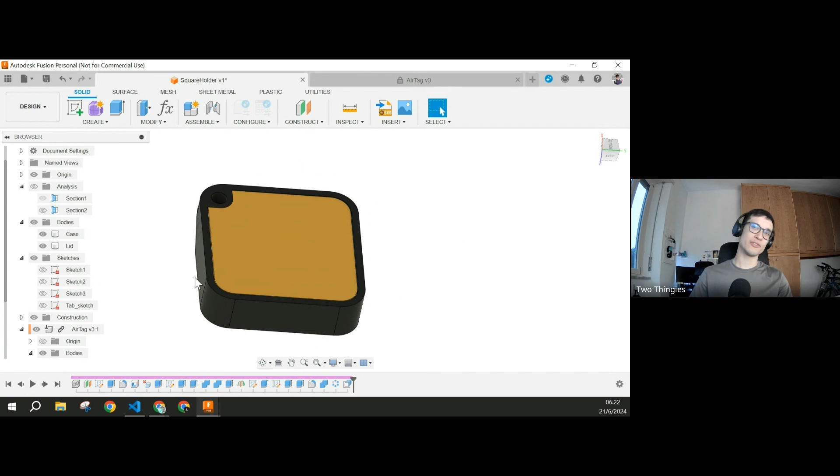But the first time I did something like this, of course, it was not like that. It was more back and forth, like different extrusions here and there. And then I figured out, okay, I could just have done a shell command instead of an extrusion plus another. So yeah, I think it comes with practice. The more you use it.

Yeah, and I think that's a good thing to get in the habit of if you have the time. I've kind of mentioned this on my personal social media, but I don't really sketch designs very much. I know some people sketch stuff out on paper first, but a lot of times if I think about something, I'd do a very rough CAD model that's basically a disaster compared to how you're supposed to do it textbook-wise, and then you can see if an idea in your head would actually work in real life, and then you can always come back and remake the model.

And usually when I have it pretty close to what I want, it's a lot easier to remake it. You would think it would take a lot longer than it actually does when you have the measurements pretty much honed in from the rough model to make a more polished one. But I think that's a good thing to get in the practice of: how can you make this a more simplified and structurally sound model. So yeah, I think that's a common thing that people do.

Yeah, definitely. Even myself, sometimes I'm hesitant to share the Fusion 360 model. We share STL files all the time with Two Thingies, but sometimes I don't want to share the Fusion file because I'm a little bit, let me say, ashamed of how the feature tree looks. And I think, okay, if someone else has to work on this design and adapt it, no one will understand what it's supposed to do.

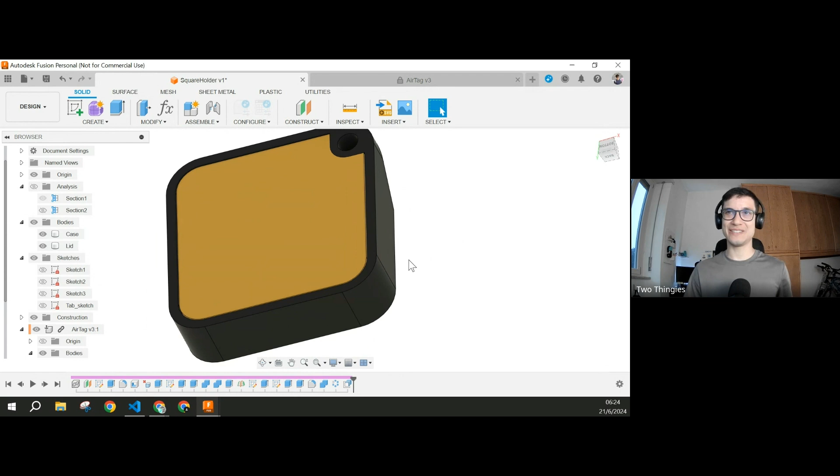So having organized feature trees like this really helps you, even when sharing your work with others, or for yourself down the road. If you open a design that you did a couple of months ago and you don't remember all the operations that you did, it's easier to have an organized tree. Right, for sure. All right.

Well, I have a couple quick questions at the end I like to do with everyone that I talk with. So what's something you wish you learned sooner about Fusion? Okay, this is something I learned just a couple of days ago. If you want to select something behind this body, I would just go and hide the case and then go and select the feature I'm looking for, right?

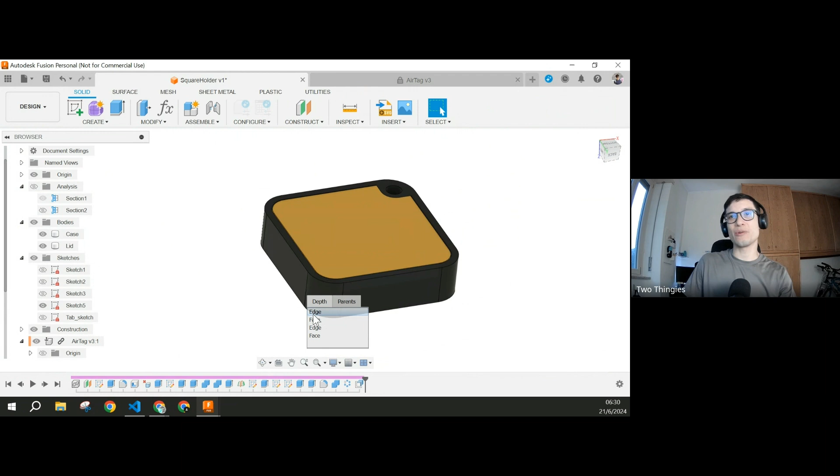But actually, I just learned that you can hold the left click and it lets you toggle through different things that are behind what you're seeing. So that's really helpful. That's something I didn't know about. I learned about it this week, so I think I will be using it more often.

Yeah, that's a really helpful tip. I call it like the X-ray vision mode or something, because that's kind of what it does. It sees through whatever your cursor's pointed at. So yeah, it can be really helpful when there's something that's for whatever reason hard to select. It really makes it possible to do that. So cool. Yeah, I like that you shared that.

So another question is, how did you learn Fusion? Did you take any courses? Did you just learn through YouTube? Was there any individual channel or person that you felt like helped you get a lot better at it, or was it just kind of trial and error? What are your thoughts on that?

Yeah, I learned from YouTube videos. I learned from a lot of tutorials, especially there's this guy on YouTube, Product Design Online. If you're familiar with him, he makes some really, really good videos. And also some people around the 3D printing community, like for example, Maker's Muse. Right, Maker's Muse. Yeah. He made some tutorials, not in-depth tutorials, I think more like how he did some features on Fusion.

So looking at how other people do things on Clock Sprint 3D, for example, like this feature I just showed you, he showed it in a video. So yeah, I find that looking at how other people do things really helped me. So I think there's a way to pay back. Hopefully this could be useful for someone just learning.

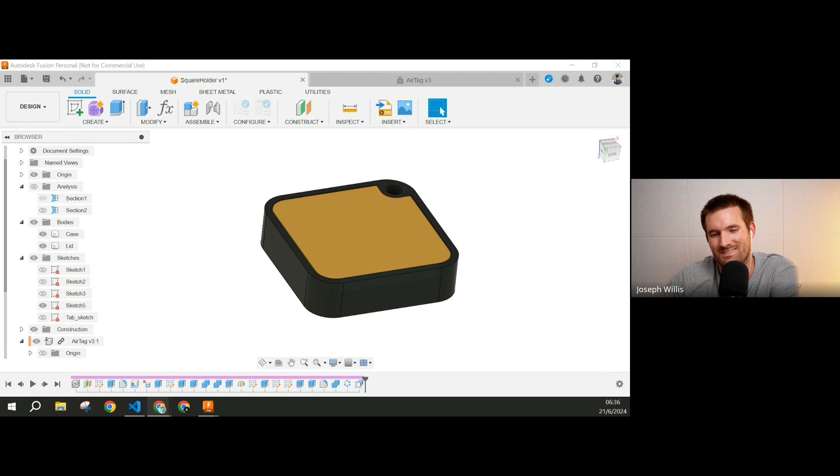Definitely, it's a great feeling, like, oh, it works. Yeah. Your eureka moment. Finally got it. Cool. Exactly.

And then I feel like I know the answer to this, but do you use a mouse or a trackpad? No, I just use a mouse. Just a cheap mouse from Amazon. It doesn't have to be special. It doesn't have to be a fancy one, but using a mouse in general makes your life in Fusion a lot better. So if anyone's listening, it's time to invest in a cheap mouse at least. It's a very worthwhile investment for sure.

And then the last question I have for you is what is your favorite design that you've made, or the design you're most proud of? It can be the one you've sold the most of, the one that was the hardest that you figured out a solution for, or just whatever comes to mind.

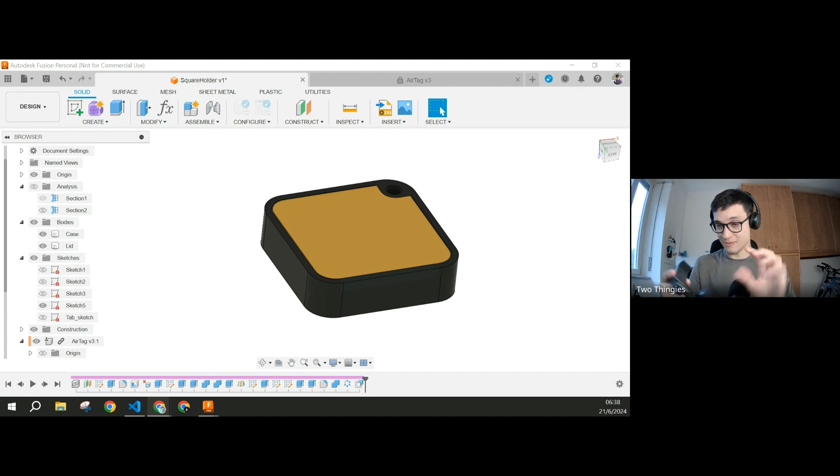Well, actually, it's one of the first designs we shared as TwoThingies. We started TwoThingies and wanted to share photos and videos of what we were doing with 3D printing. To record the videos, I figured it would be easier if we had some support to hold the cell phone on a tripod. And being a maker, instead of buying it, I designed it. So I made this one, in 2022 or 2021, I think. This is the only one I've printed.

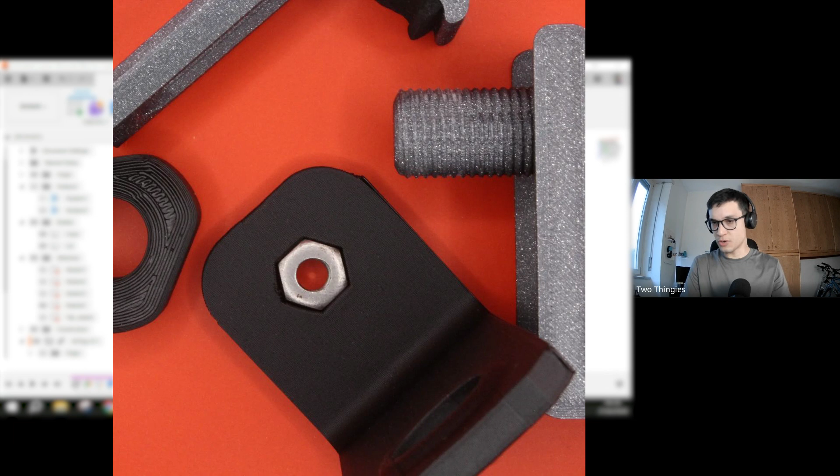I'm really proud of this design because it worked the first time. I sat there and tried to really plan how it works. It has a bunch of features, like it's self-centering, it rotates so you can adjust the position of the cell phone, and it's really designed for printing. I put a lot of thought into it before actually printing it, and it worked the first time. A bunch of people have downloaded it and shared their feedback, and it works for them too. So it's a really nice feeling.

You can see it's a little bit worn out after the years I've been using it, but it works. Yeah, it did its job. I like that question because it may or may not be the most downloaded or popular design, but sometimes it's the self-fulfilling aspect of thinking it through and it working the first time that makes us feel the most fulfilled about different designs. So really cool. Thank you for sharing that.